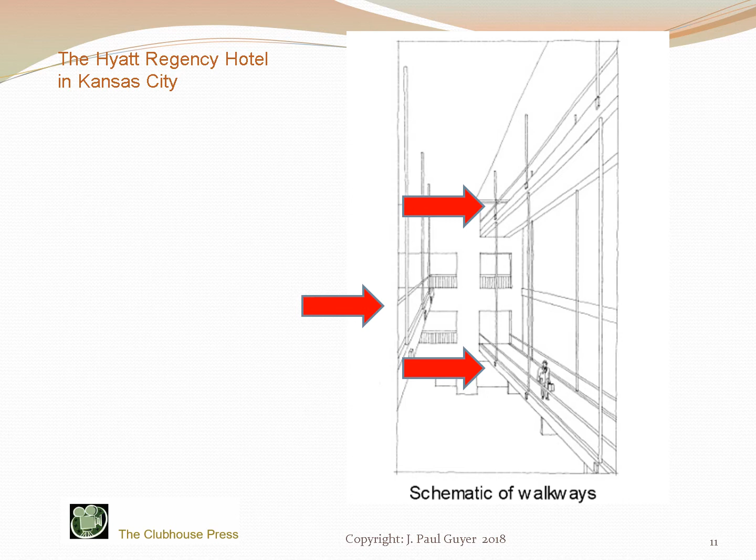The architectural solution developed to address this awkward circulation pattern was to provide three skyway walkway bridges from the sleeping room tower through the atrium lobby airspace to the conference center module. These walkways were at the second, third, and fourth floor levels. The walkways were suspended on rods from the ceiling structure of the atrium lobby module, which was 4 stories above the lobby floor. Walkways at the second and fourth floor were vertically aligned, and the third floor walkway was offset.

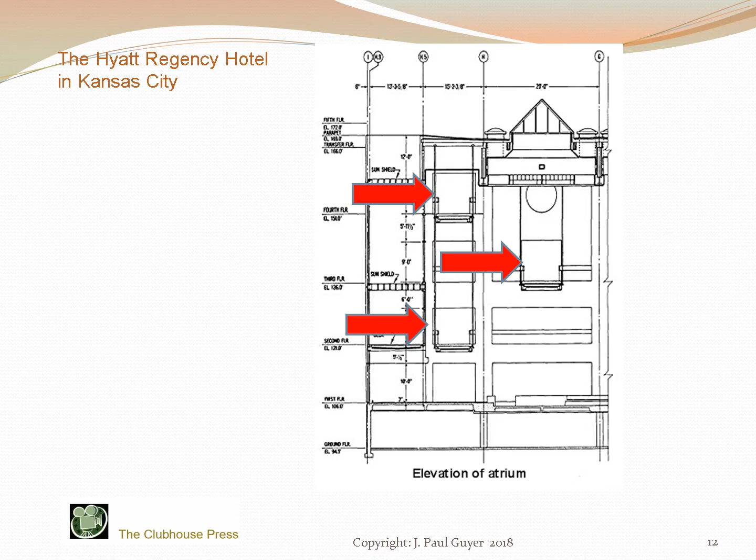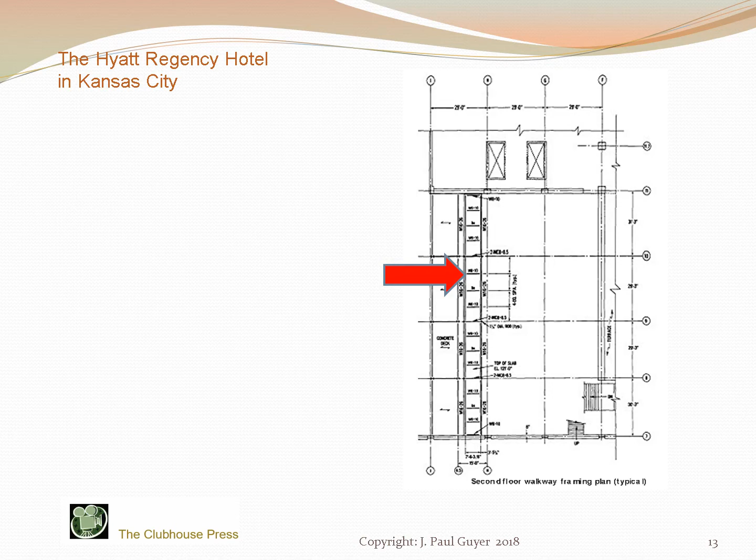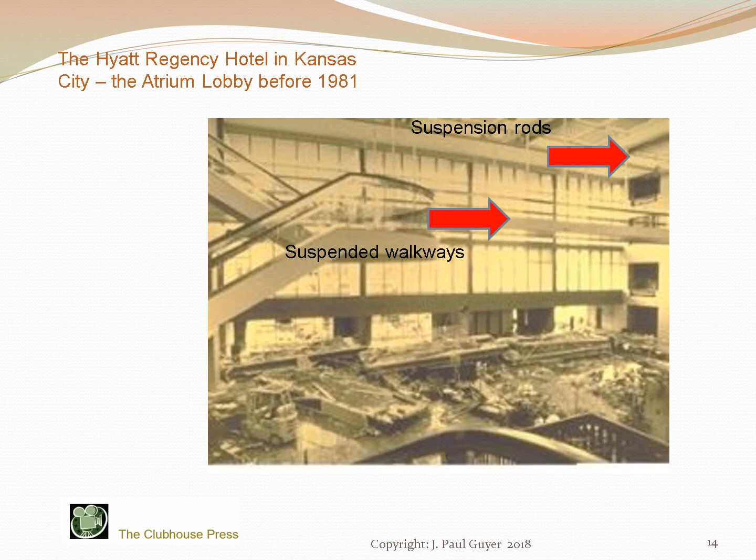This is a plan view of the typical framing scheme for the deck structure of the 3 walkways. This incident consisted of the catastrophic collapse of the 2 walkways at the second and fourth floor levels. This is a picture taken immediately after the collapse.

Now let's look at the history of this project, how it was conceived and developed. Pay particular attention to the number of players or actors in this story, because this is only peripherally an engineering story. It's really a story about how people behave.

The story begins in 1976 when civic and business interests in Kansas City wanted a major hotel in downtown Kansas City. An entity called the Crown Center Corporation was created, apparently with support from the Hallmark Card Company, which was headquartered in Kansas City, to develop a hotel. Crown Center Corporation was the owner of the project.

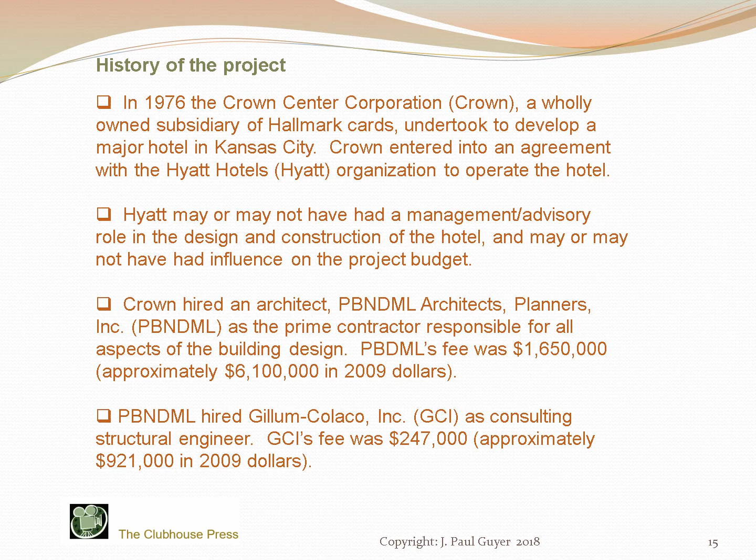Crown hired an architect called PBNDML to design the hotel. PBNDML was the master designer, apparently to oversee all aspects of design. PBNDML hired a structural engineering firm, Gillum Colaco, as consulting structural engineer.

Gillum Colaco, GCI, subcontracted the structural engineering work to an affiliated firm, Jack D. Gillum and Associates, who we will call Gillum. Gillum prepared approximately 60 drawings for the structural design. Make note of that number, 60 drawings.

A company called Concordia Project Management Limited was hired as construction manager. There were, of course, also all of the myriad of other firms involved in the design: civil engineers, mechanical engineers, electrical engineers, geotechnical engineers, landscape architects, surveyors, and so on. Are you beginning to see quite a few actors wandering on stage as this play develops?

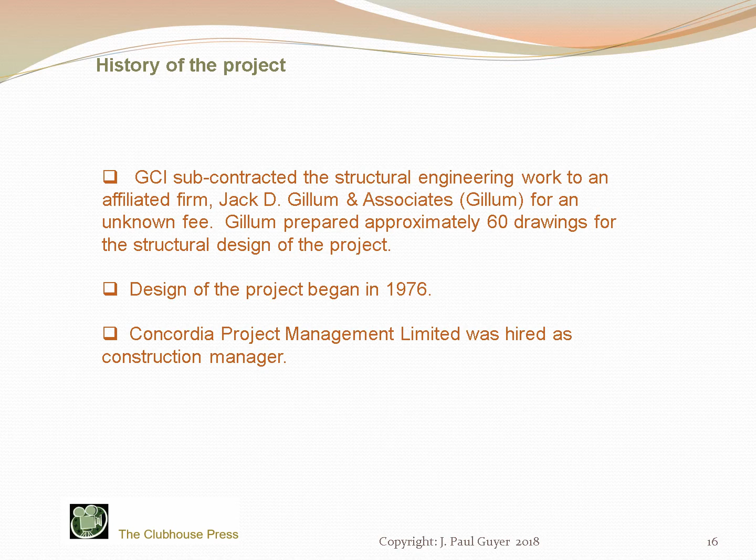Design was begun in 1976 and completed in 1978. A company called Eldridge Construction was awarded the construction contract based on lowest cost competitive bidding, traditional design bid build.

As has been the industry practice for decades, if not centuries, it is highly likely that Eldridge determined its winning bid by soliciting competitive bids from subcontractors, plumbing subcontractors, electrical subcontractors, steel erection contractors, selecting the lowest subcontract bids, adding his overhead and profit, and that was Eldridge's bid, a very common way of doing business.

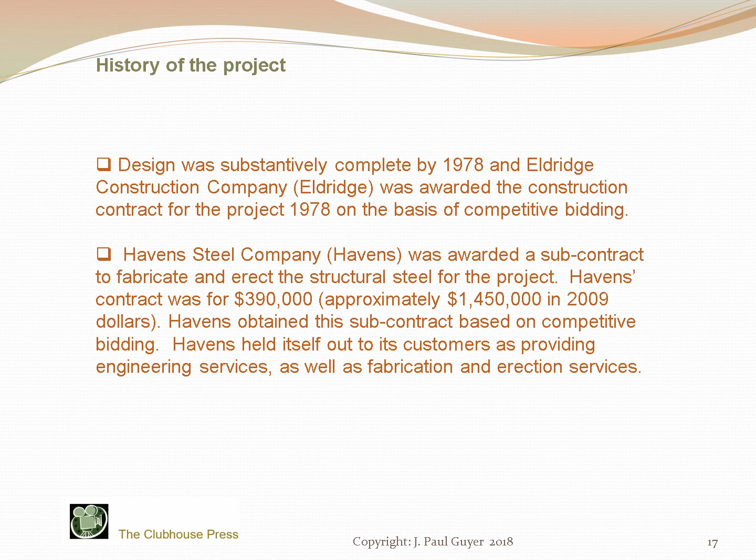One of these subcontractors was a company called Havens Steel, which obtained the contract for the structural steel fabrication and erection work, presumably based on the lowest bid for the subcontract. Havens advertised itself to the public as being capable of designing as well as fabricating and erecting steel structures.

As the business of steel structure design and construction has evolved over many decades, the design work has commonly been divided between the nominal structural engineer for the project and the steel erection subcontractor. A simplistic but reasonable way to visualize this practice is to say that the nominal structural engineer sizes the beams and columns, say, but the erection contractor designs the connections and other details.

Havens subcontracted its portion of the steel design work to a company called WRW, which had a registered professional engineer as a principal. WRW prepared over 40 drawings for the structural design. Note and compare this to the approximately 60 drawings prepared by the nominal structural engineer Gillum. Not that much difference between the two.

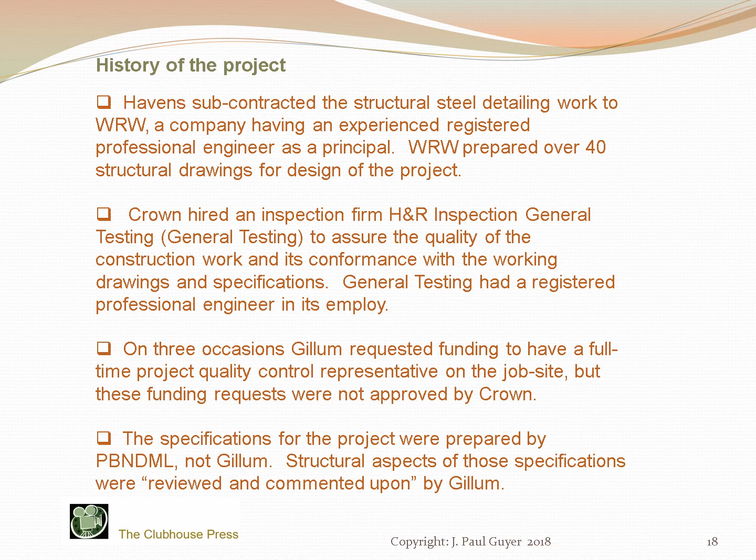Some additional data points to be considered. Three times Gillum requested funding to have a full-time inspector on the job, but all requests were denied. Who denied them? The construction manager, the owner? Was the Hyatt Hotel Corporation, the operator of the hotel, involved? The structural specifications for the project were not prepared by the structural engineer Gillum, but by the architect, PBNDML, the master designer. Was this for cost-saving reasons?

During construction in October of 1979, a portion of the atrium ceiling structure collapsed. This occurred on a weekend. No workers were present and there were no injuries or fatalities, fortunately. But this certainly indicated something was not right with the steel structure for the project.

Crown, the owner, hired an independent structural engineering firm, Seiden Page, to investigate the cause of the collapse, but not to review the complete structural design. Should this have been done? Was this done for cost-saving purposes? Are we continuing to see more and more actors in this play? Are we seeing economic pressures playing a part in this story?

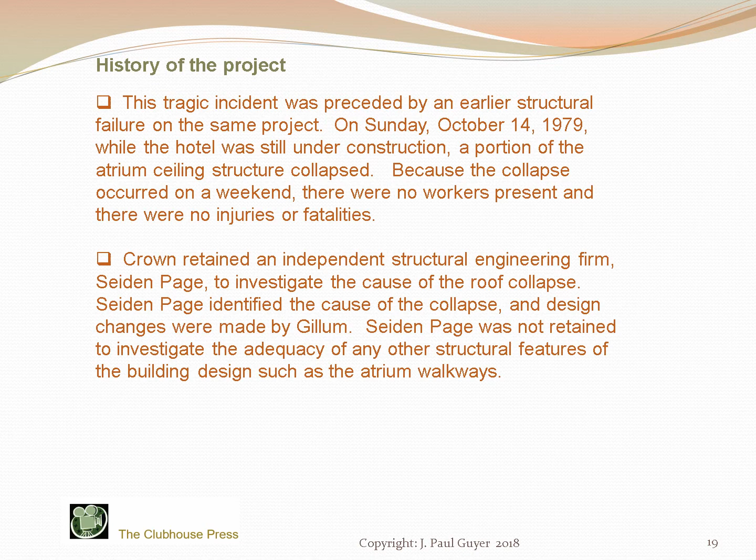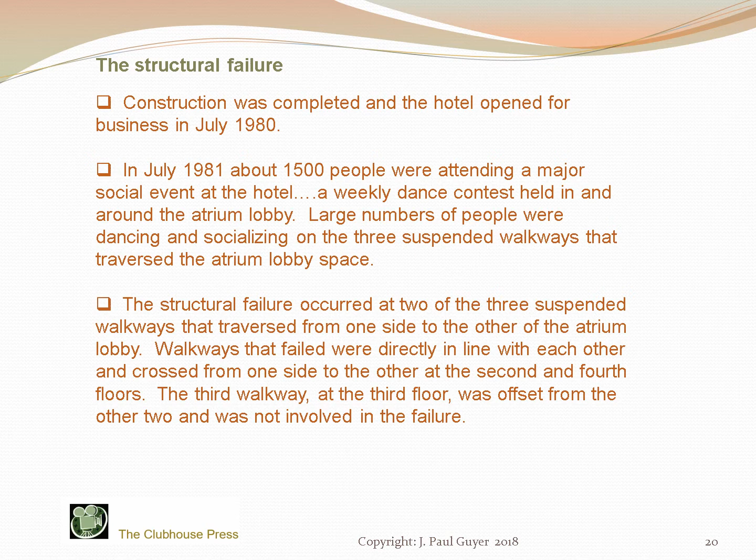Construction was completed and the hotel was opened for business in July of 1980. In July of 1981, about 1,500 people were in the atrium lobby attending a dance contest sponsored by a local radio station. Many of these people were on the 3 aerial walkways. Without warning, the walkways that were aligned at the 2nd and 4th floor levels collapsed. There were 114 fatalities and 200 injuries.

The 4th floor walkway collapsed onto the 2nd floor walkway directly below, and both collapsed to the ground floor of the lobby below. Here is the result.

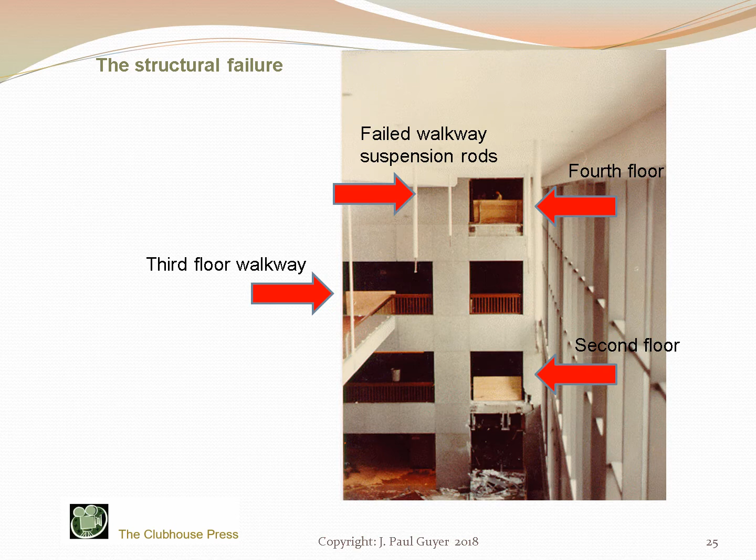Here we see the second and fourth floor walkways that have collapsed, and the failed suspension rods are dangling in the air. The third floor walkway remains unaffected because it was set off to the side. Here is the third floor walkway still in place.

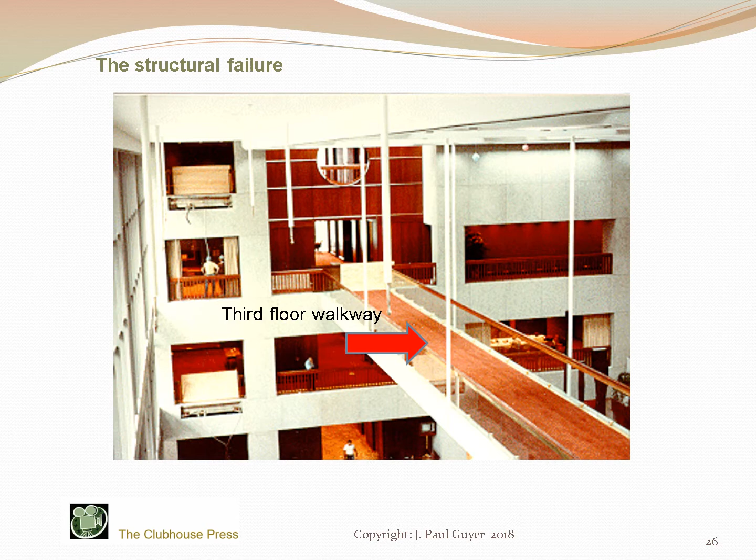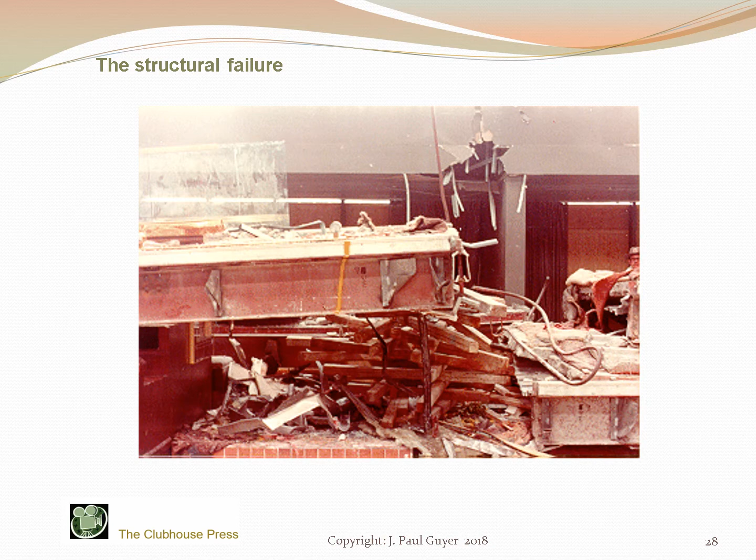So what went wrong? The cause of the failure was a change made by the steel detailer, WRW, a subcontractor to Havens, and at Havens' behest. And Havens, of course, was in turn a subcontractor to Eldridge. And the change was to the suspension rod design shown on the structural engineer Gillum's drawings.

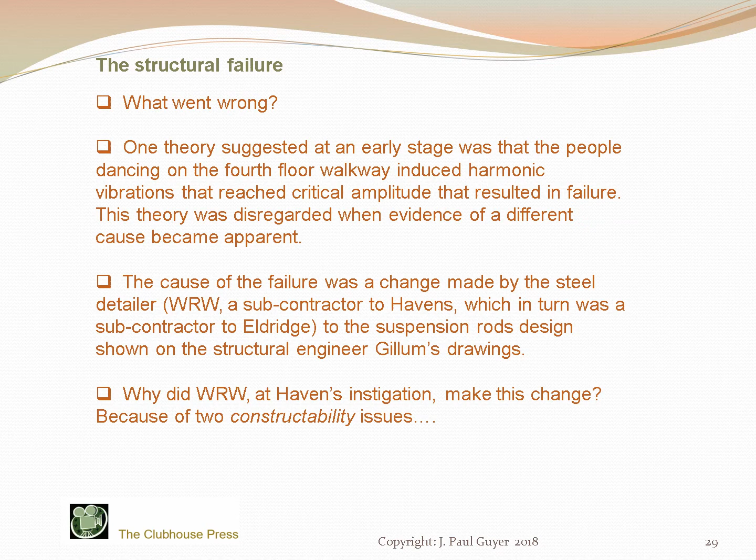Why did WRW at Havens' instigation make this change? It was because of two constructability issues. First, the Gillum design required continuous suspension rods approximately 40 feet long. Havens determined these would be unacceptably expensive to procure and install. Second, the suspension rods would have to be threaded for approximately 30 feet of their length in order to install the critical nut on the rod that would support the fourth floor walkway deck. This was determined by Havens to be unacceptably expensive to fabricate and install.

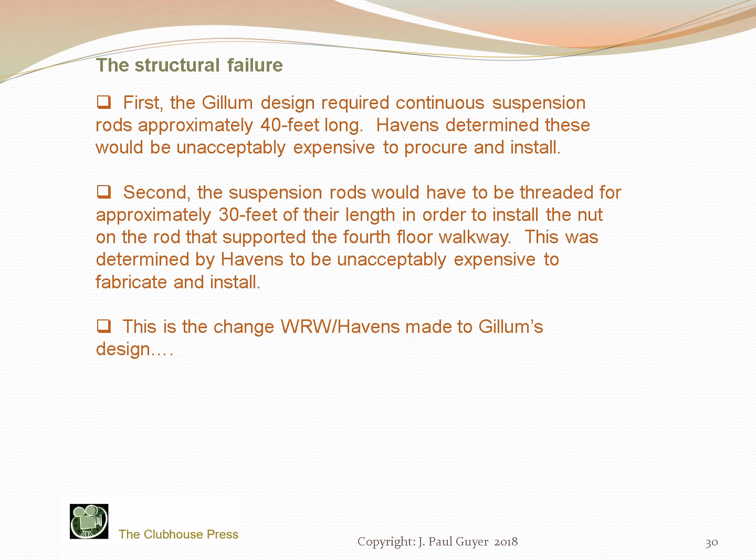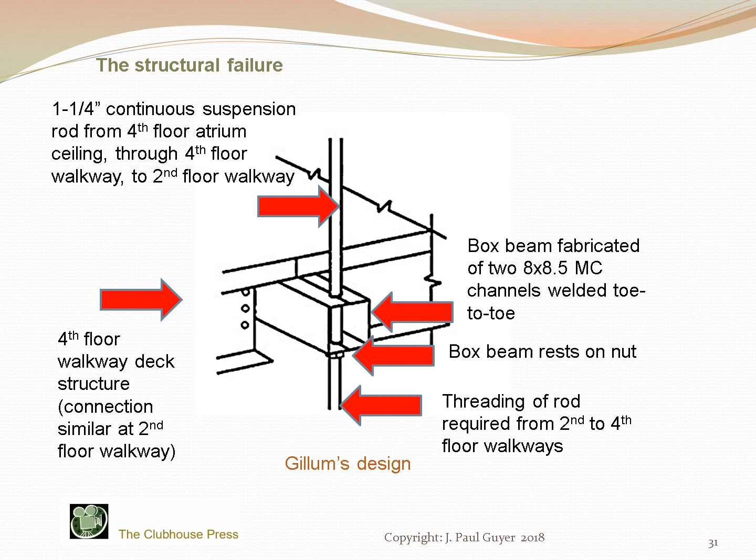This is the change that WRW Havens made to Gillum's design. This is Gillum's design for connection of the second and fourth floor walkway decks to their suspension rods. This is the change that Havens WRW made to Gillum's design. Rather than the single continuous 40-foot long suspension rod, Havens changed the design to provide for two separate shorter rods.

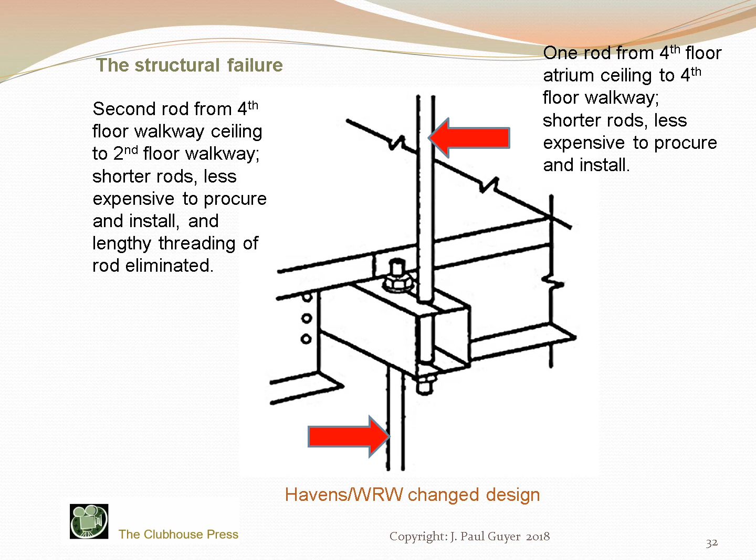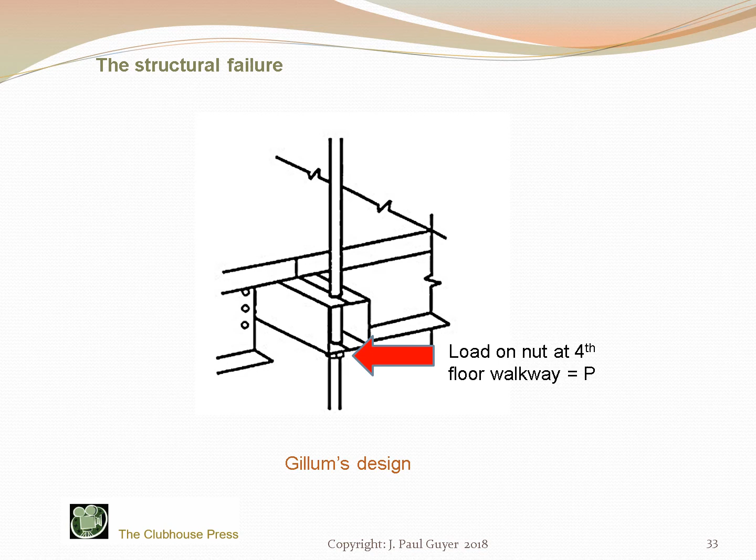In Gillum's design, the load on the nut at the fourth floor walkway was P, whatever it is. In Havens WRW's design, the load on that same nut is 2P, twice as much.

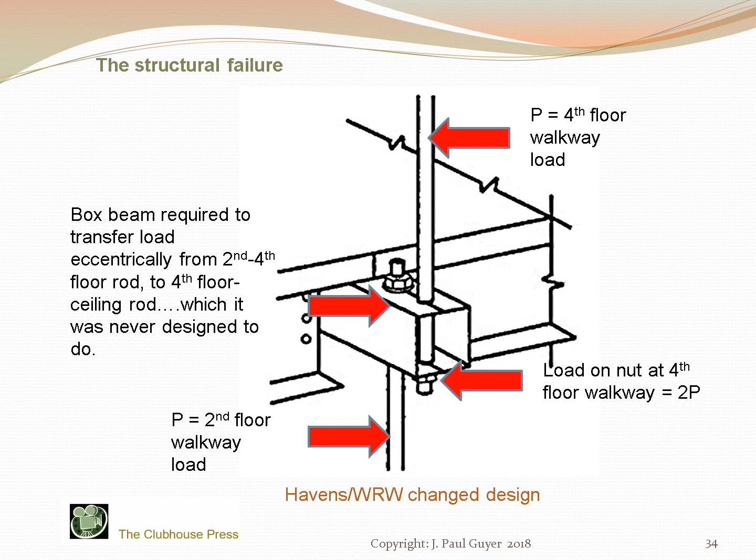There was an additional consideration. Gillum's original design sized the suspension rods such that they were strong enough to support only 60% of the imposed load based on code allowed stresses. But given the difference between code allowed stresses and actual yield stresses of materials, this was not a fatal error. It did not cause the incident. More about this later.

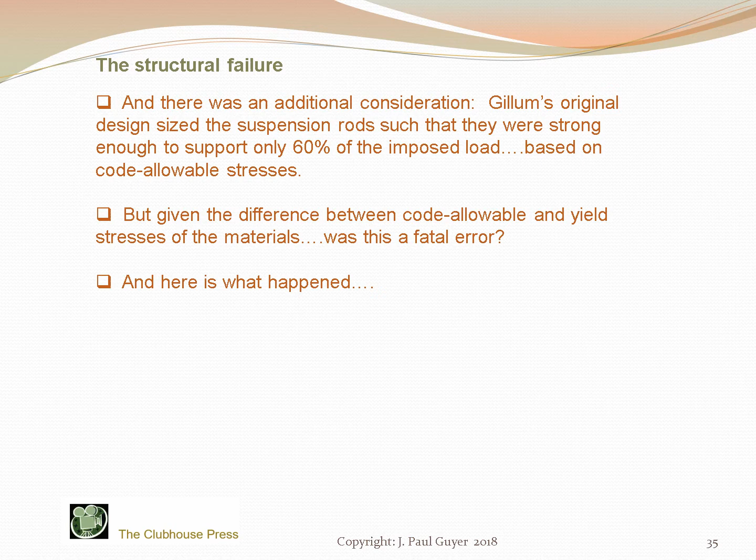Here is what the incident looked like.

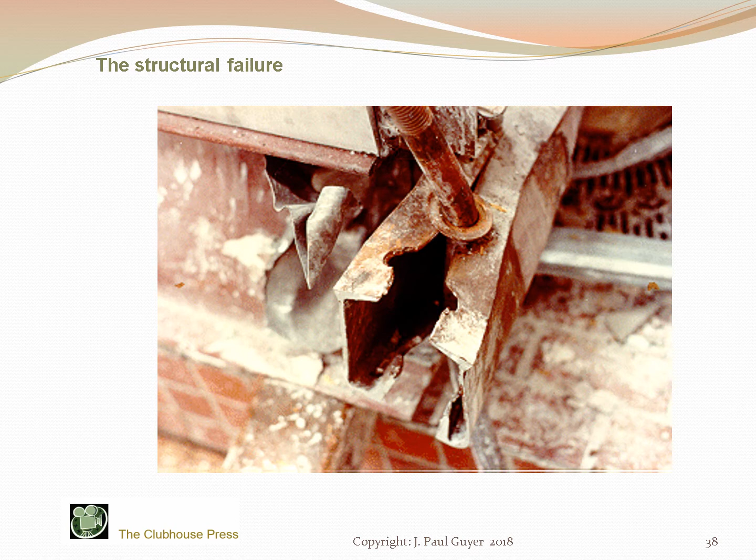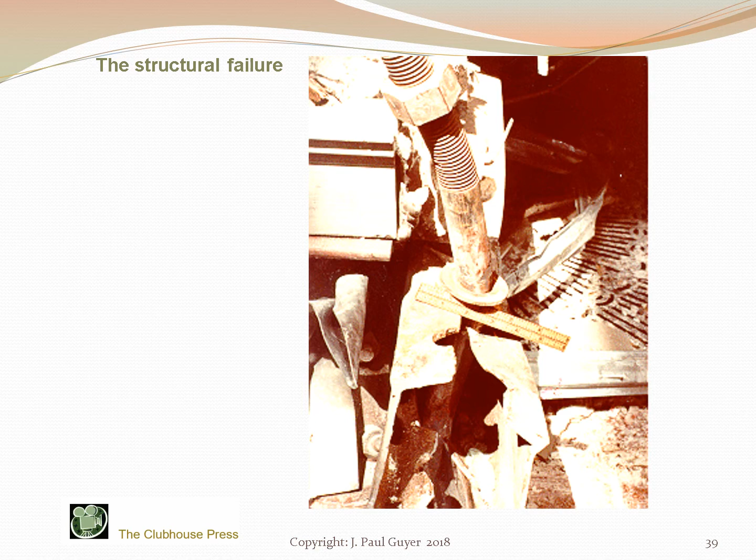And now the finger pointing begins, the post-mortem. Havens said that they notified Gillum of the change by telephone. Gillum denies having received any such telephone call. Does any of this sound familiar to any of you?

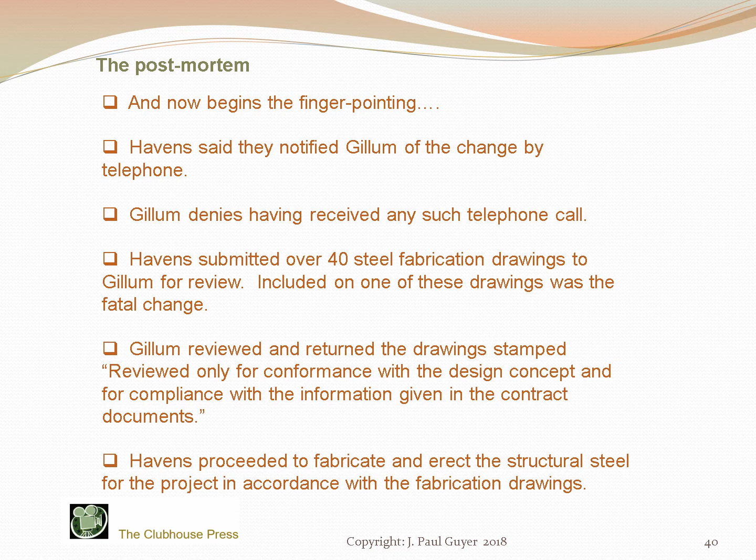Havens submitted over 40 steel fabrication drawings to Gillum for review. Included on one of these drawings was the fatal change. As is conventional practice with engineers, Gillum reviewed and returned the drawings stamped, quote, reviewed only for conformance with the design concept and for compliance with the information given in the contract documents. Havens proceeded to fabricate and erect the structural steel for the project in accordance with the fabrication drawings.

Several participants in the design and construction process purported to have told Gillum of concerns that they had about the safety of the proposed change. Included were the construction detailer, WRW, the steel fabricator, Havens, the architect, the master designer, PBN DML, and a technician somewhere along the line. Now, is there anything interesting about these allegations?

Particularly, is it interesting that Havens, who made the change, purports to have called Gillum to tell him that the change he, Havens, made was unsafe?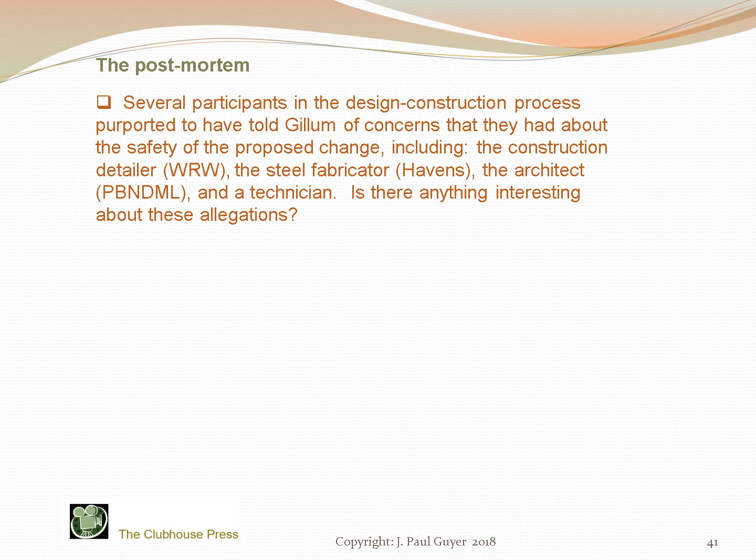This was an incident that attracted national concern, and the National Bureau of Standards, today known as the National Institute of Standards and Technology, which is a very highly technically competent government agency, was selected to undertake a technical investigation following this collapse.

NBS, the National Bureau of Standards, determined that the failure was due to, these are words directly from the NBS report, the design change which led to the failure at the box beam nut suspension rod connection, and it was contributed to by failure to design the suspension rods to code-approved stresses and failure to provide redundant suspension rods.

The National Bureau of Standards report specifically said, and I quote, under the original hanger rod arrangement, Gillum's design, the continuous rod, the box beam hanger rod connections as shown on the contract drawings would have had the capacity to resist the loads estimated to have been acting at the time of collapse, end quote.

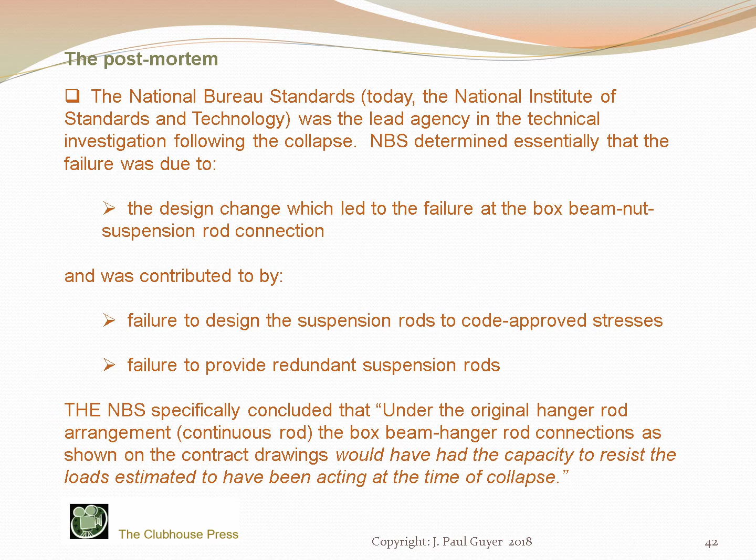And this is the executive summary. It is taken from the executive summary of the actual NBS report. Under the original hanger rod arrangement, a continuous rod, the box beam hanger rod connections as shown on the contract drawings would have had the capacity to resist the loads estimated to have been acting at the time of collapse, period.

The Missouri Board of Registration undertook an investigation. Some might call it a witch hunt. That's a judgment call.

The Missouri Board of Registration hired lawyers, not engineers, to undertake a technical investigation, such as that undertaken by the National Bureau of Standards, but lawyers. And the lawyers prepared a 457-page report that found Gillum and another professional engineer in his office guilty of gross negligence, misconduct, and unprofessional conduct.

The postmortem effectively placed all of the blame on the structural engineer nominally of record, Gillum.

But this raises questions. What is the responsibility of Havens, which held itself out to its customers as providing engineering services in addition to fabrication and erection services? And it instigated the change for economic reasons.

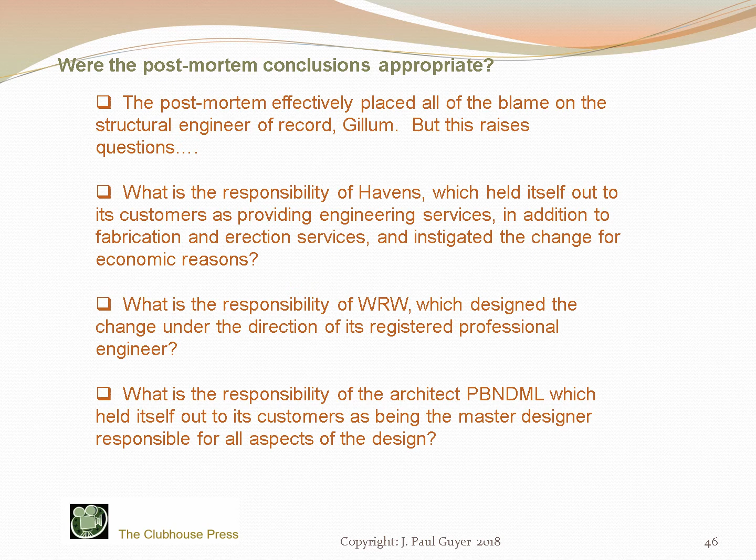What's the responsibility of WRW, which designed the change under the direction of its registered professional engineer? What's the responsibility of the master designer, the architect, PBNDML, which held itself out to its customers as being responsible for all aspects of design of buildings? What's the responsibility of Eldridge, the general contractor, which held itself out to the public as being responsible for all of the construction on the project, including the work of its subcontractors, Havens and WRW?

What's the responsibility of the owner, Crown, which did not fund additional structural engineering review by Seiden Page after the earlier atrium roof collapse, and after Gillum recommended and requested funding for a full-time representative at the job site?

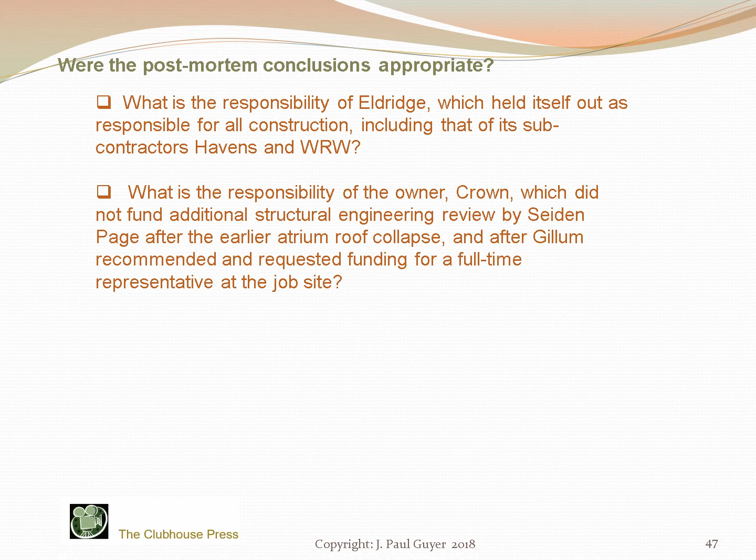Here, I believe, are some realities that we need to recognize. The building design and construction process is highly complex. It is not only technically complex, it is organizationally complex. It involves many people with different capabilities, motivation levels, and economic objectives.

A second reality that I believe we have to accept is that people always make mistakes. It's human nature to make mistakes. Even structural engineers make mistakes. Any process where people are involved needs to recognize this.

A third reality that I believe we need to recognize is that economic pressures are very powerful forces in the building design and construction industry. All of the members of the building design and construction team are under enormous economic pressures. Most, if not all, obtain their work through price competition, competitive bidding.

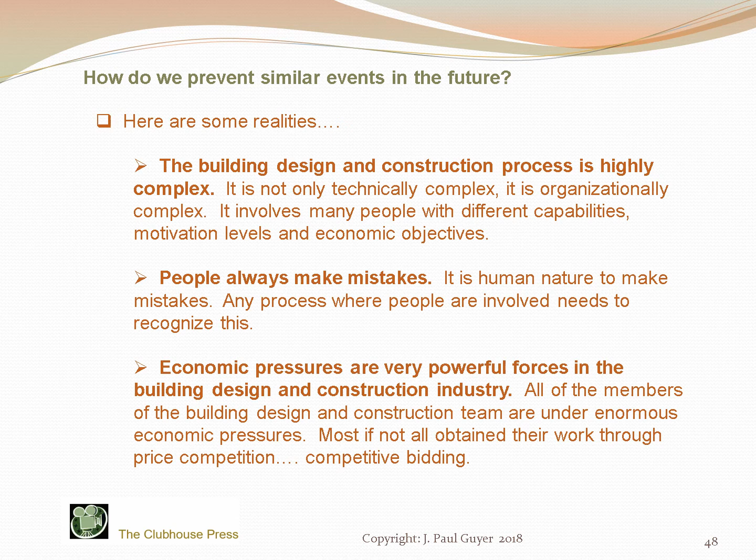Another point that I believe we have to recognize is it is axiomatic that someone cannot be held responsible for achieving an objective without commensurate authority. And in building design and construction, an essential part of that authority is budget authority. It is also axiomatic, however, that owners will never give up budget authority to anyone.

And finally, although all members of the design and construction team do not have the same level of expertise, all do have some level of expertise.

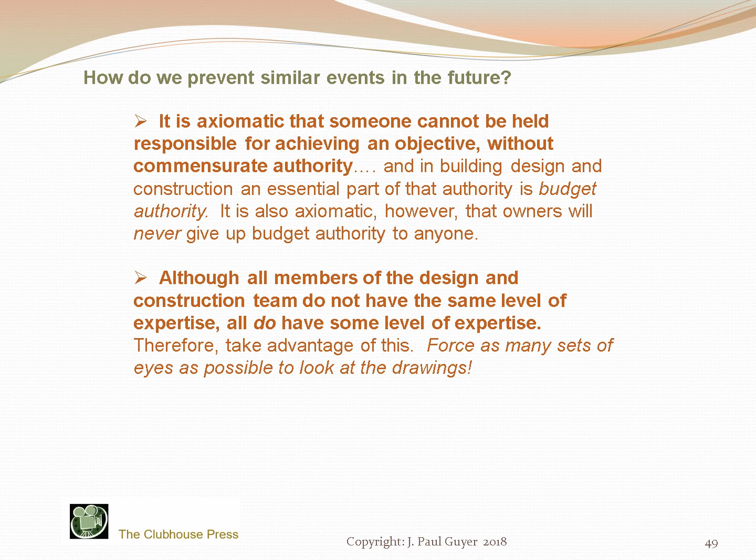Therefore, to prevent events like this happening in the future, take advantage of this. Force as many sets of eyes as possible to look at the drawings, specifications, and other documentation associated with the project, such as change orders, requests for information, test results, and so on, because someone may catch these mistakes. The cause of this tragedy was an ineffective change management system.

To prevent this type of incident from occurring in the future, three things are important, I believe. A clearly defined organizational structure for the design and construction process. Clearly defined and enforced procedures for the process. And a third...

Approach that I believe has a lot of merit is independent constructability reviews on major projects. This is when a completely independent firm with expertise in engineering and construction is brought in to review the relevant documents as the project proceeds - the drawings, specifications, change orders, shop drawings, requests for information, etc.

In the case of this project, many entities, persons and companies that might have caught this mistake by Gillum did not have an opportunity to review the documents where the change was made, the shop drawings. They probably also had a very low motivation level to take their time to look at the shop drawings for the steel erection. But someone along that more circuitous but essential path, from the detailer to the fabricator Havens to the general contractor Eldridge to the construction management firm Concordia to the master designer architect, someone might have spotted an error like this. But when that circuitous but essential process is short-circuited, these potentially useful sets of eyes do not have an opportunity to contribute to the review.

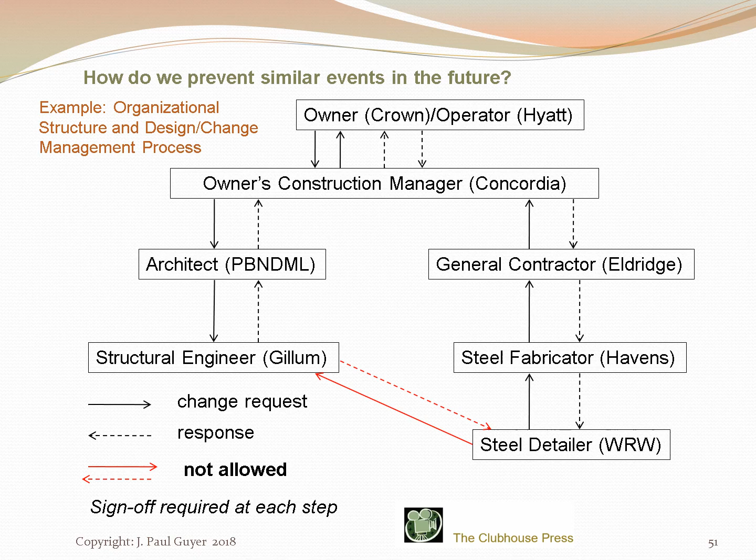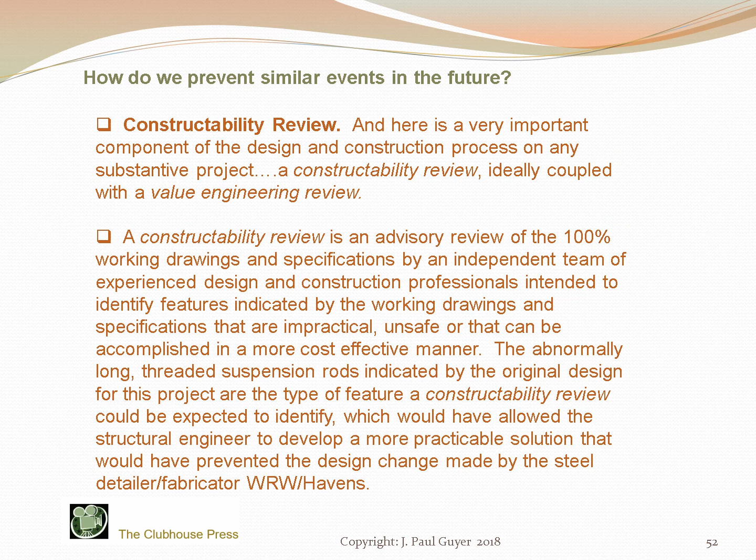So the constructability review, I will reiterate, is an approach that I think is very helpful with complex projects.

So to summarize how I see this project, this incident, what needs to be done is to force as many sets of eyes as possible to look at the drawings, specifications, and other documents associated with the process. Force the team members to take things seriously by requiring sign-off on every substantive decision and action.

Not approval - it certainly isn't appropriate to have a mechanical engineer on a project approve a structural change, but I believe the mechanical engineer or even an electrical engineer should be charged with at least looking at shop drawings and change orders and requests for information and this sort of thing, simply because he or someone in his or her office might spot a potential error.

And then finally, the third step that I think is very important is to convince owners to fund, on complex projects, relatively complex projects, an independent constructability review. And they will save more as a result of a constructability review than the constructability review will cost.